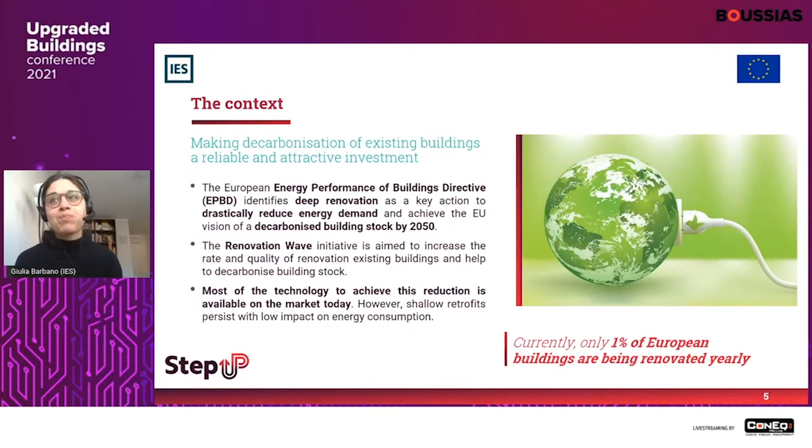So what do we want to do in StepUP? We want to make sure that deep renovation of a building is an investment that is considered to be reliable, attractive, and sustainable.

So we're looking at this from the process point of view, and from the point of view of having iterative, continuous feedback loops, looking at all the phases of the renovation process to make sure we improve on all of them.

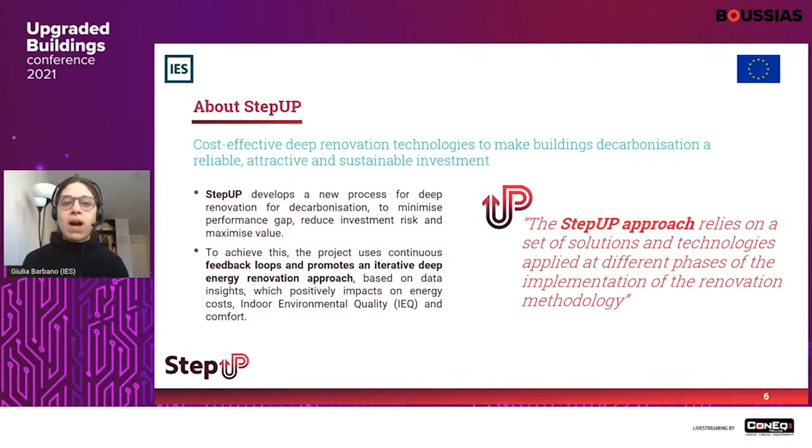And we're able to make it a more accessible process for the whole supply chain. So our 5 objectives are: first, the overarching objective is to make renovation an attractive and reliable investment.

We want to do it by developing a new methodology that is deeply rooted in data in near real time from the building. So we have to know what happens before we make any kind of decision.

We want to reduce the performance gap, the difference between the design and the actual performance of the building. We want to optimize the investment, developing innovative financial models which take into account the specific nature of deep renovation.

And we want to spend as little time as possible on site to reduce the impact on the occupants of existing buildings, with modular renovation packages that are plug and play.

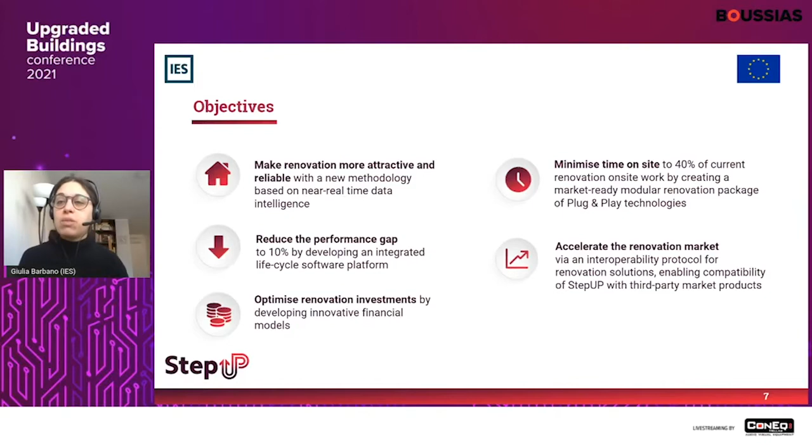And accelerate the renovation market by making these technologies interoperable with the broader market of renovation technologies. So the methodology, as I said, is iterative, a continuous cycle, rooted in knowing how the building is performing.

Defining the needs, the high priorities, what is going to give me the best value in making my building better performing, and using less carbon.

Once we have that, based on information we have on the building, we can set up a renovation process. We can design the renovation using a digital twin of the building, and we can assess the potential renovation scenarios with high reliability.

Once we have that, we can decide which are the key energy conservation measures for our building, and choose the technologies from the plug-and-play panel that is developed both within the project and in the broader market.

We deploy them and we optimize their operation, and we start again from looking at how the building is performing, for an iterative process of continuous improvement.

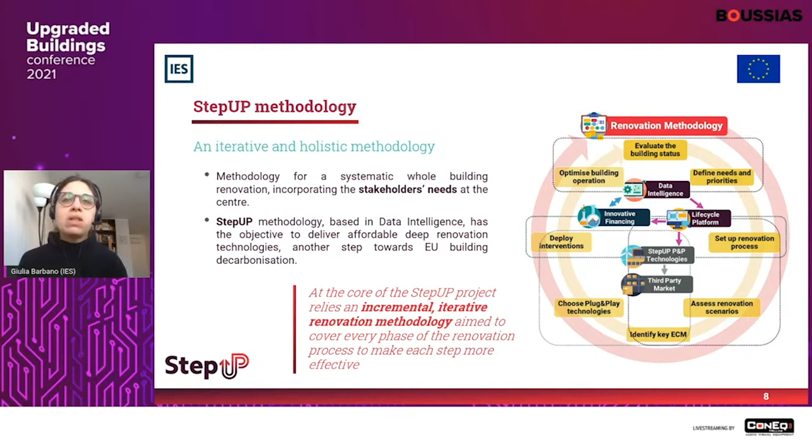We have laid out this approach in a public report, the integrated draft of the StepUP methodology, and its companion document discussing the data infrastructure requirements.

This report looks at the scope of the methodology, its boundaries, and discusses all the various phases of renovation. It's a public document, and we are very interested in getting it out to stakeholders in the value chain.

To people considering renovation, especially owners and technical experts working on renovation.

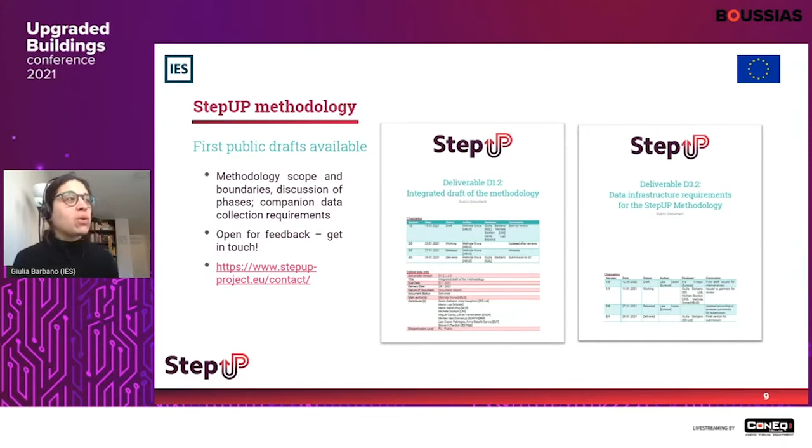Then we have 4 supporting solutions to the methodology. The first 2 are technical and happening directly on the building. The first one is a plug-and-play envelope system. This is a deep decarbonization solution in that it reduces demand by improving the insulation of buildings. It's a pre-assembled envelope panel that integrates the windows and includes provisions for technical systems.

Then we have the SmartHeat Solution. This is a solution to store thermal energy generated from renewable sources on site and deliver it at the best times, when demand is high, to optimize the renewable production on site.

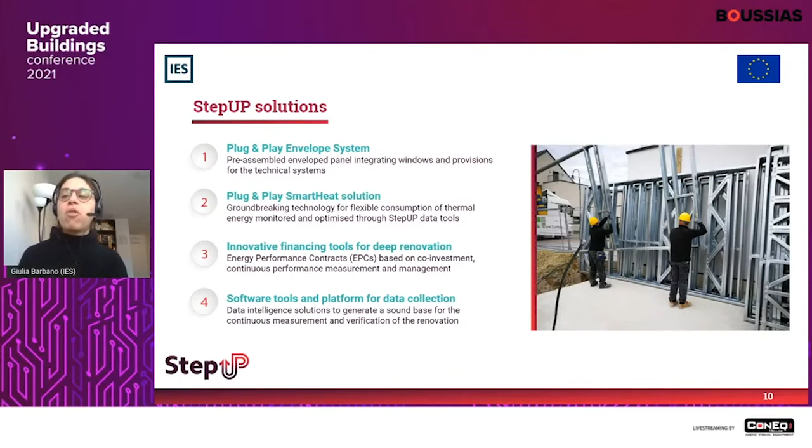Then we have innovative financing tools for deep renovation, such as smart energy performance contracts that capture the complexities of renovation. And all of this is rooted in data intelligence and digital twins based on physics modeling, to make sure that every time we make a decision, we know we can forecast it accurately and know how the building is going to behave.

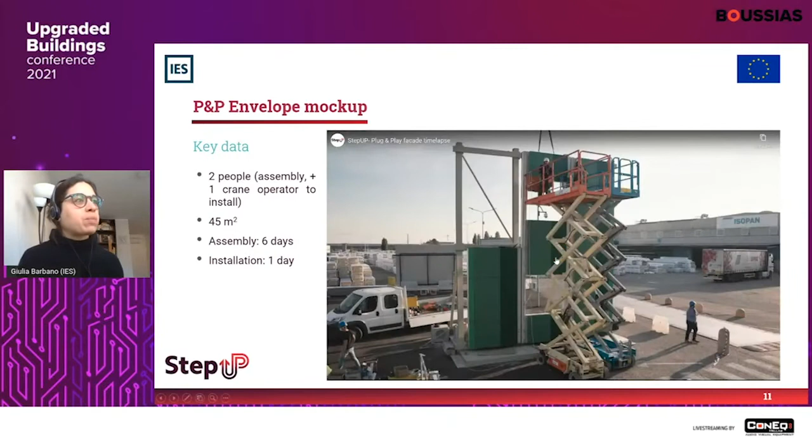So I will show you now a quick video. It's a time lapse of the mock-up of the plug-and-play envelope that our partner Manni has developed. Manni is an Italian company that has been working on this prefabricated facade.

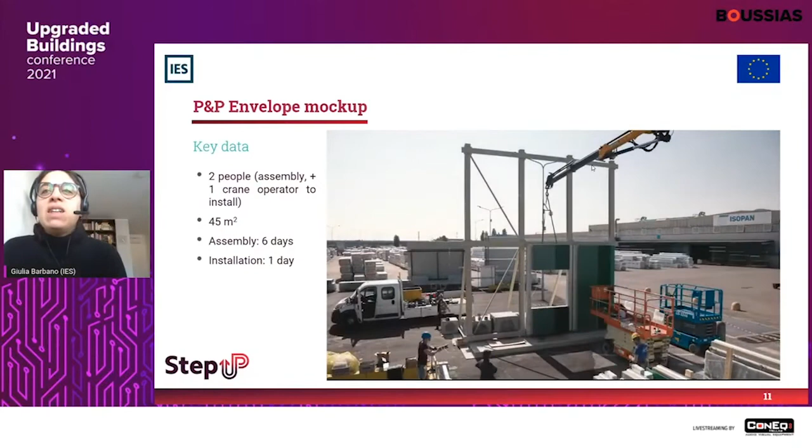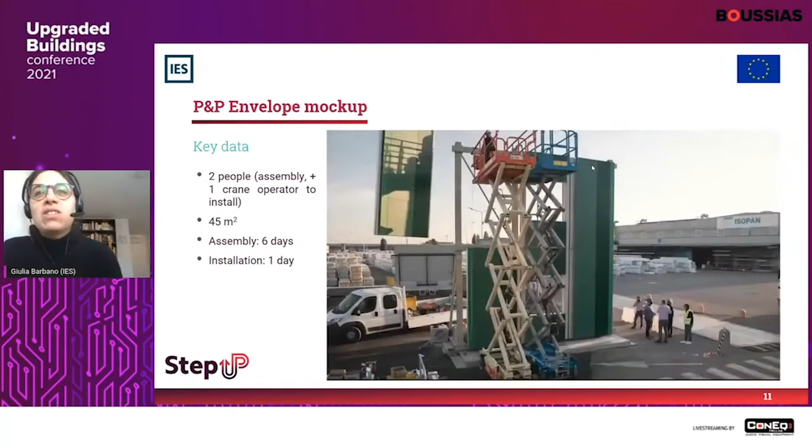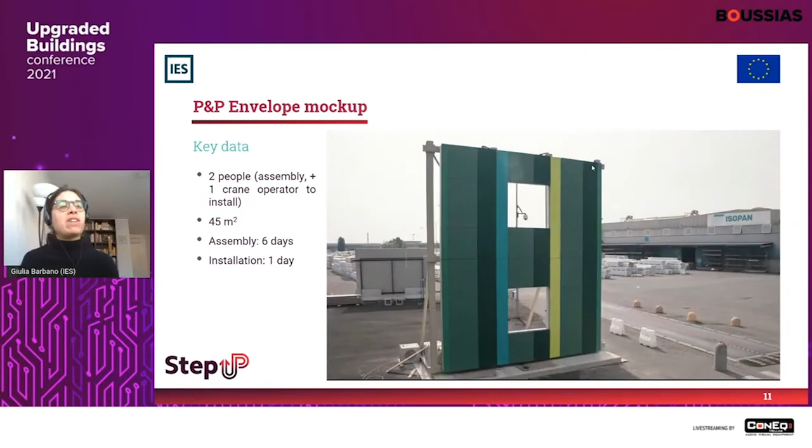As you can see, this is 45 square meters of facade. It had been assembled in the workshop in 6 days by 2 people. The installation on site by those 2 people plus 1 crane operator took roughly 1 day. So you can see how really fast and effective this technology is.

Then the SmartHeat Solution, as I mentioned before, is produced by Suntherm, an innovative SME from Denmark. It's a solution to produce and store heating energy from renewable sources, especially solar during the day when there's higher generation potential, storing it into PCM-based heat storage batteries, then distributing that heat over the day, especially at night, when there's higher demand for heating.

This is something that has already been deployed in smaller buildings, and now we're looking at expanding to buildings like apartment blocks or schools, etc.

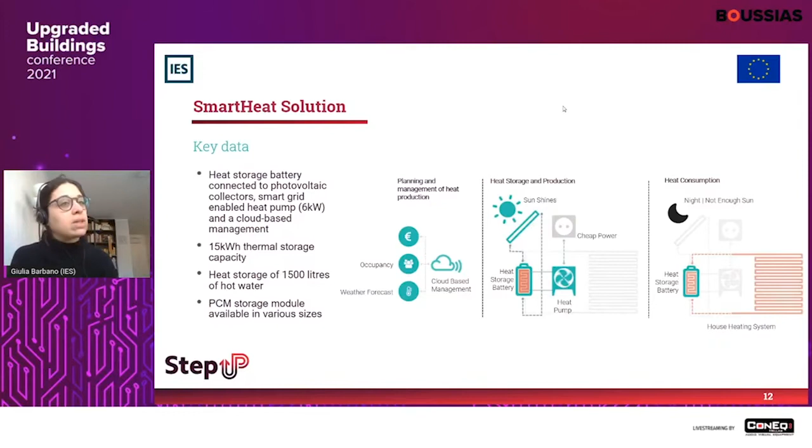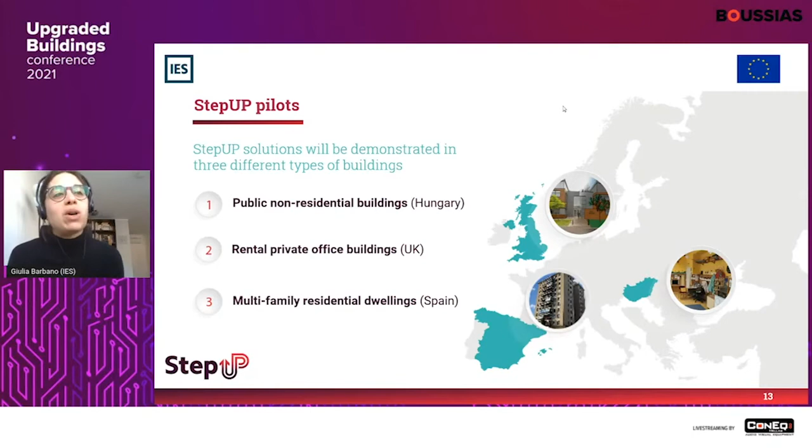So this brings me to presenting the pilots of the StepUP project. We are looking to demonstrate in 3 different buildings. They are very different amongst them by climate and type, because we want to try a full extent of the typologies of building that need renovation in Europe. So we are looking at public non-residential buildings in Hungary, rental private office buildings in the UK, and a multifamily residential apartment tower in Spain.

Our pilot in Hungary is the Zöld-Liget Kindergarten, in the 18th district of Budapest, a very typical case of deep renovation public buildings. It's a kindergarten from the 60s with very poor envelope and massive heat loss, both through the roof and walls. While the windows were changed a few years back, they still have very poor energy performance.

So here we're looking at both installing the envelope, the plug-and-play envelope, insulating the roof, but also installing the SmartHeat system, changing the heat distribution, and installing PV panels. So we're looking at very deep decarbonization and how these kinds of solutions can work for public authorities.

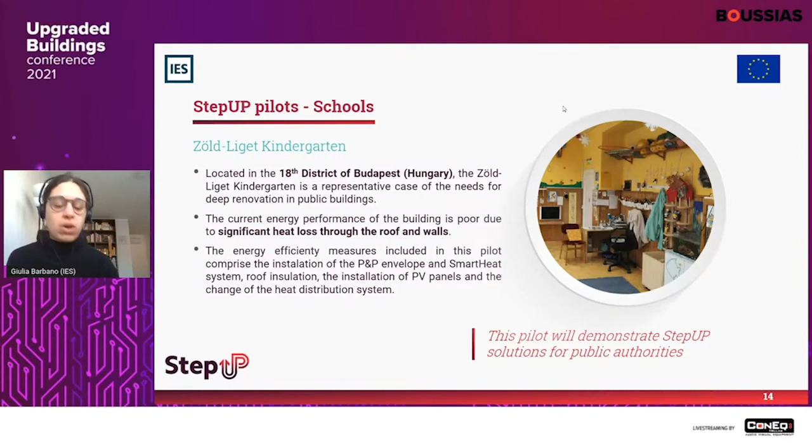Then we have the IES Office Headquarters. This is a virtual pilot. We will not be doing installations on the building, but we have a very detailed digital twin of the building, to try and test how the building would react to different solutions.

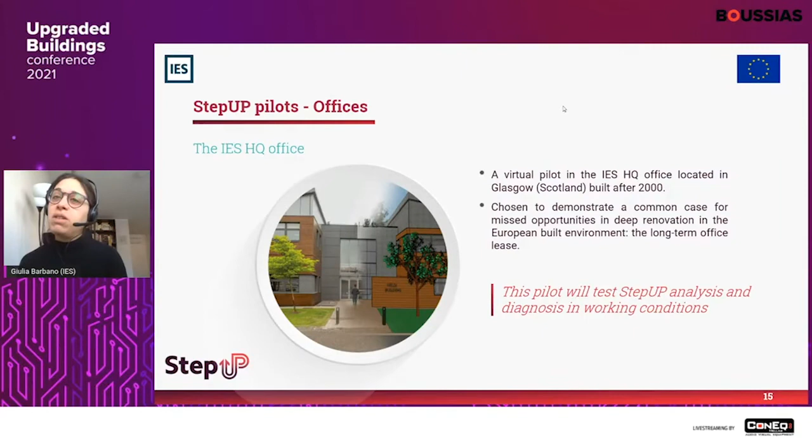And this is particularly interesting because it's a typical case of rental. So we have the so-called split incentives, where an owner and a renter benefit differently from energy renovation measures. And then finally, our pilot in Spain, in Pamplona, is the omnipresent apartment tower, which is the most common, by far, building in Europe.

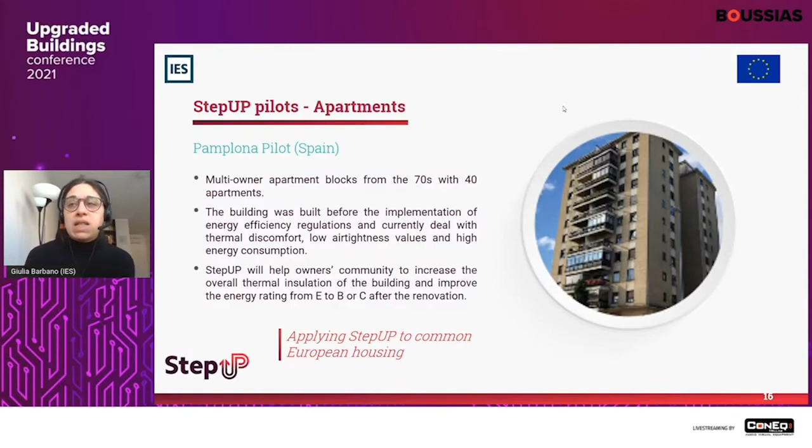And it has absolutely no insulation. So it's very poor air tightness, very high energy consumption. So here we're looking at a drastic increase of the energy performance as well.